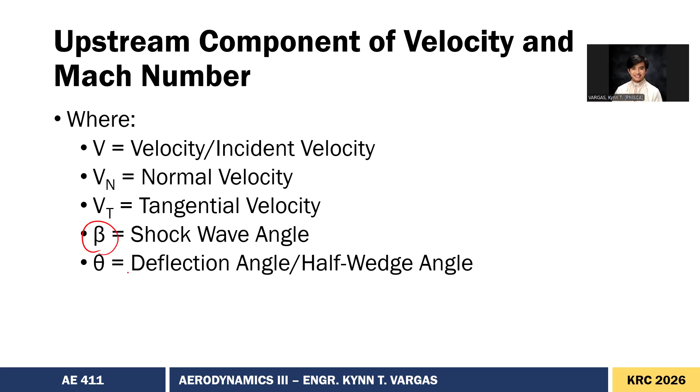So let's continue. After we are familiar with the derivation or the geometry of the components of the Mach number for the oblique shockwave, let us derive the necessary equations using trigonometry. For starters, we need to identify the following variables: the velocity or the Mach number, its normal and tangential components, as well as the most important ones, the shockwave angle beta, and the deflection angle theta.

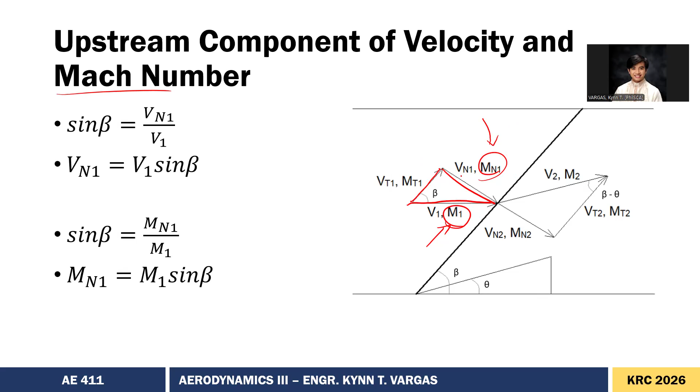Now, for the upstream component of velocity and Mach number, in most cases Mach number is our concern here. Let's start with this triangle. As you can see, we have the velocity normal here and our reference, so in most cases it's the normal Mach number and the Mach number. This is given, and our target is to get the normal Mach number since this is what we need to be able to proceed.

So we need that straight line. What do we do here? We have the angle beta for the triangle. Directly opposite it is the normal Mach number. And adjacent to it, which is the hypotenuse, is the Mach number M1. So, since this is opposite and we have the hypotenuse, this is simply sine theta equals opposite over hypotenuse.

Now, it's not sine theta that we use for this convention. As stated before, what we need is the angle beta. So that's our reference now.

So we have sine beta equals the opposite, which is the normal Mach number, and our reference is M1. Since we need M normal, we just need to rearrange this algebraically. Moving this here, we have the first formula: in order to get the normal Mach number, we need the formula M1 sine beta. Again, beta is the wave angle, the shockwave angle.

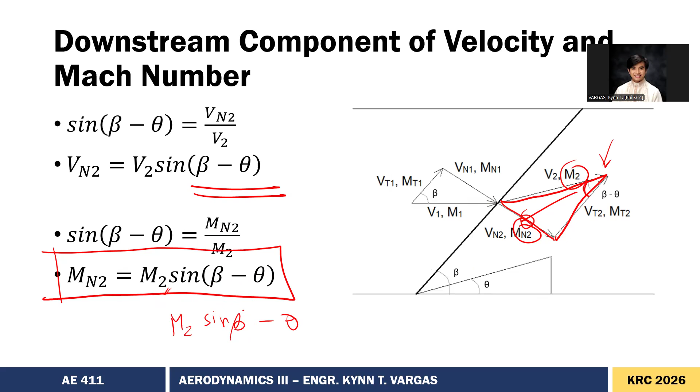So we have the formula MN2 equals M2 sine of the angle, which is beta minus theta. Make sure your calculator input is correct, because if you were to accidentally put it as sine beta minus theta without parentheses, the calculator would read it differently. So make sure the parenthesis is included.

So next, after we get MN1 and MN2, we will proceed with M2. Why, what's the thought process again? We have M1 given, but you can't pass through directly because it's slanted - the shockwave is slanted. So what do you do? You convert it first, or get the normal component.

Disregard the losses first. Then after that, because this is a straight line, you can pass through it like a normal shockwave. After that, you convert MN2 into its M2. So what happens? From M1 to MN1 to MN2 to M2.

So the formula for the normal shockwave is given as this - we've discussed this repeatedly. So what do we need now? We need to replace it with this one. So remember, let's replace this first. Since the formula has M2 on one side and M1 on the other, replace all the M2 with its normal component, and for M1 with its normal component too.

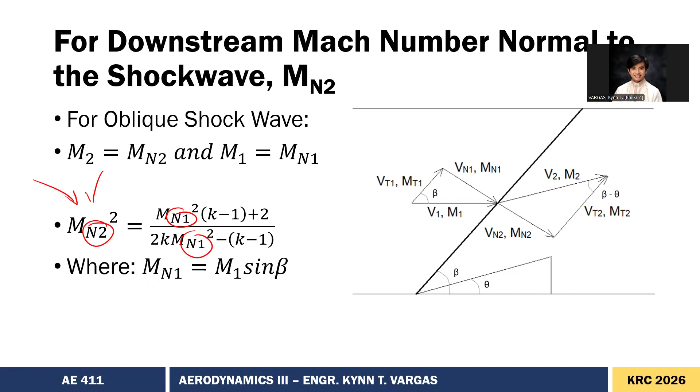This is what we're looking for, M2 - this is the end goal, because M2 is the downstream Mach number. So from here, we just rearrange, revolving around M2, or simply you can shift-solve. But what's the purpose of understanding it algebraically? So that you can manipulate the variables depending on the question.

Because the questions in your exam won't just be plug and play. By knowing how the formula works, you can understand the questions and equations better, and you won't be limited to just one type of question. So remember that Mn2 equals M2 sine of beta minus theta, and this is our next formula to finally get from M1, here, up to M2. So that's what we want to happen. But before you get there, because it's slanted, you pass through this first.

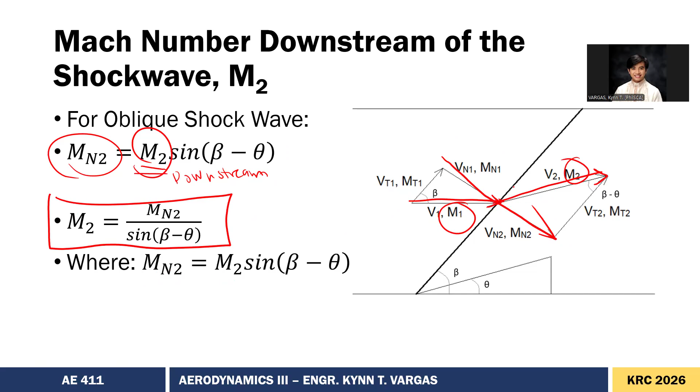So, next, once we identify what is M1 and M2, we need to get the density ratio first. From the normal shockwave equation, it is given as this. Please refer to lecture 5 for the derivation or memorization.

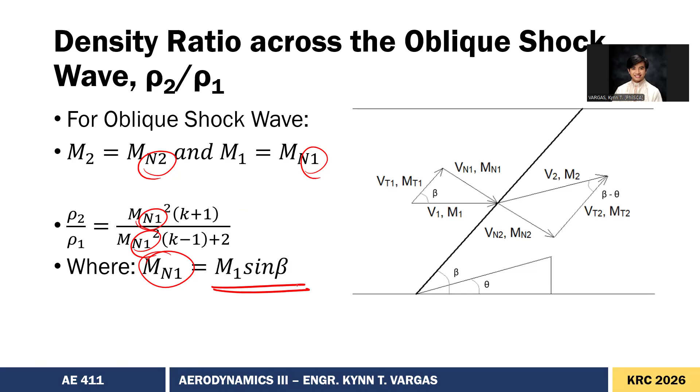For oblique shockwave, similar with the Mach number, we need to replace this with the normal components. So palitan mo lang si Mn1. Then tandaan, hindi to diretso. Papalitan mo pa to, kailangan mong isolve from here. So 2 steps lang naman siya instead of memorizing a new formula, nagdagdag lang tayo ng steps. So makukuha mo na si density ratio.

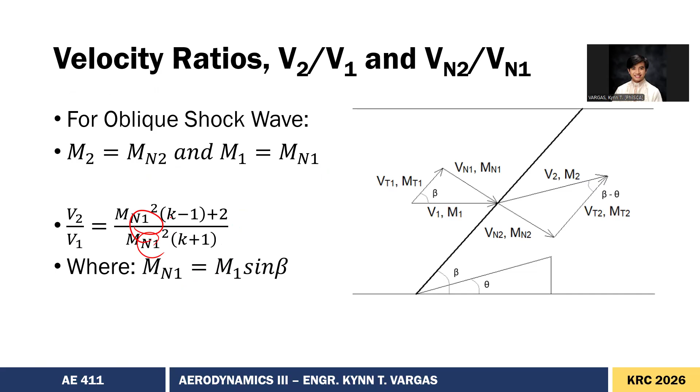How about velocity ratio, which is simply the reciprocal? Similar situation, you need to get the normal component, you need to substitute the normal component lang. Then next is our pressure ratio, which again you need to substitute the normal component. And you have completed the density, velocity, and pressure components.

Since temperature is equal to simply the pressure ratio times the velocity ratio, i-multiply mo lang, you get the temperature ratio using the equation of state. However, if sigurista ka, you can also use the formula for Rankine-Hugoniot. Except,

Ayoko nito because you need to compute this entirely on its own again. Pero dito kasi, meron ka ng pressure and meron ka ng velocity, so hindi ka na need ng additional step. Imumultiply mo na lang sila, given na tama sila. So ngayon, kung gusto mong maging sigurado, pwede mong gamitin to.

So make sure lang din na papalitan siya similar with the previous ones. Tandaan, pag OSW, the M1s should be replaced with the MN1s. Tapos ito, isosolve mo na using this.

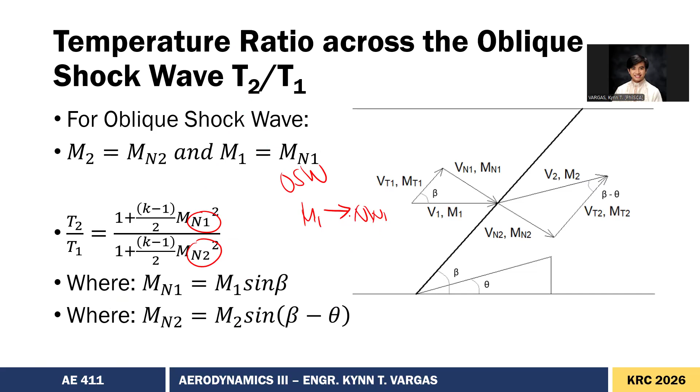So ngayon, ano yung reason for that? The fluid element kasi is adiabatically slowed down to zero velocity, so the total temperature is equal in both regions. Region 1, region 2, they are equal. So itong ratio na to, magiging equal lang yan.

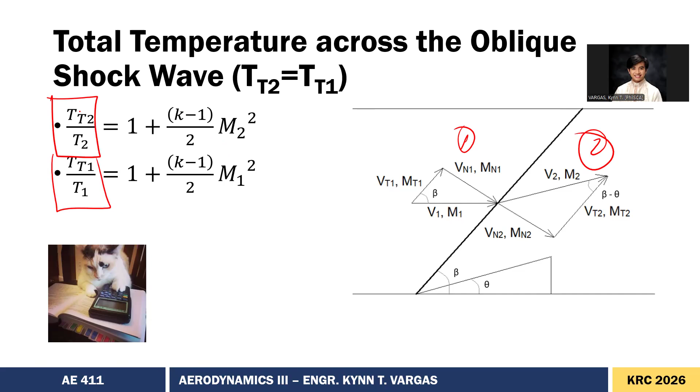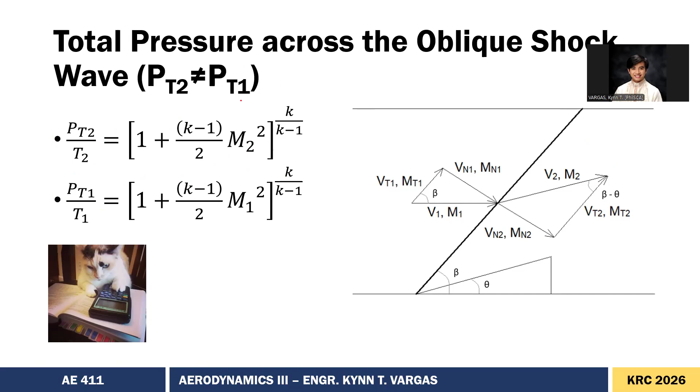But how about the total pressure across the oblique shock? So anong gagawin natin dito? For the total pressure across the oblique shock, magkaiba lang naman sila, but the formula is in itself parehas lang. This is from the isentropic relations. So, nothing new. This is not something new.

The deflection angle theta - if you look closely or inspect the equation, the deflection angle is a function of the shock wave angle and the Mach number. So habang bumibilis ka, or kapag bumibilis ka, may changes sa Mach mo, at meron ding changes sa shock wave angle mo, etong changes na to ay directly related sa deflection mo, which is true.

Yung deflection angle mo, which is yung theta, mag-i-identify siya kung hanggang saan yung extent ng shockwave mo. At syempre, ganun din yung i-allow niya depende sa bilis mo. So, it makes perfect sense.

Now, if you look closely, ito ay given, so ito ay shift solve. You need to shift solve this one, which is allowable. Ngayon, medyo matagal tong i-compute. So anong gagawin natin? You need to divide this into segments.

You can compute this segment A, segment B, and segment C. So compute mo yan, hiwa-hiwalay, then ang gawin mo, A times B over C. That's one possibility. Now, if you were to shift solve this one, make sure na itatanong sa inyo ng calculator, x equals what? In normal cases, ini-equal lang yan or 0.

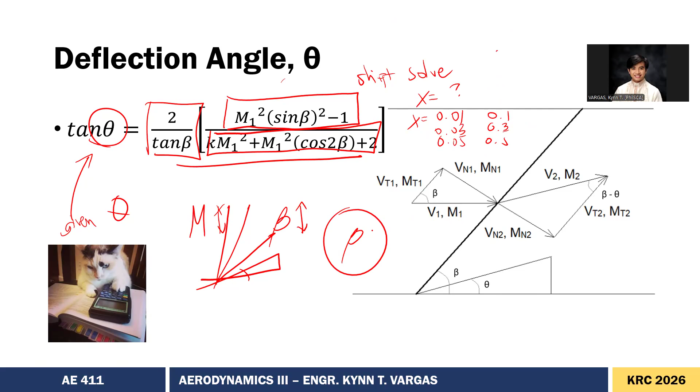So approximations yan, nakukuha? Ang gusto kasi nating makuha ay beta, because beta is the shock wave angle. Ito yon, deflection angle is given yan. So ito yung solving process.

Tinatanong ka, given ba yung wave angle beta? If no, then you need to compute for the wave angle beta through shift solve. Ngayon, if na-compute mo na siya, you can use the beta to get the normal as well as the given M1. Ngayon, if yes naman given, sige, diretso ka na.

Ngayon, pag na-solve mo na si normal, pwede mo nang ma-solve si M2. Ito, shortcut na siya. So paano pa yung dapat mangyayari dito? So from MN1, you will transfer to MN2 before yung MN2 magta-transfer to M2, which is ito. So nakukuha, ang end product natin is the M2.

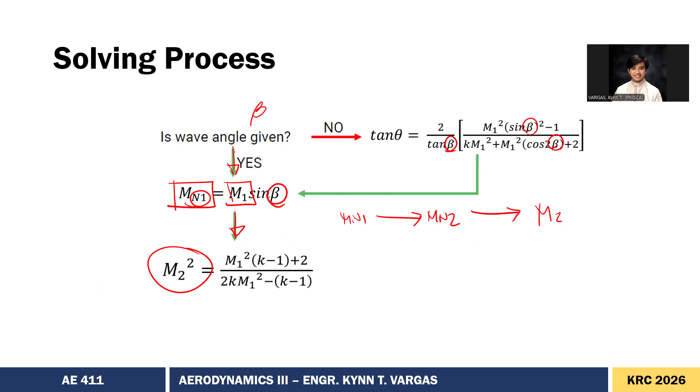Ano lang pinagkaiba? For normal shockwave, which is NSW, you use M1 directly. But for the OSW, you will use MN1, and si MN1 is from M1. May additional steps lang because nakatagilid siya, hindi siya pantay. Kuha? So that's it for the solving process.

And we have, in fact, practice problems with this, so i-explain ko din doon. But for now, let's move on to the next topic.